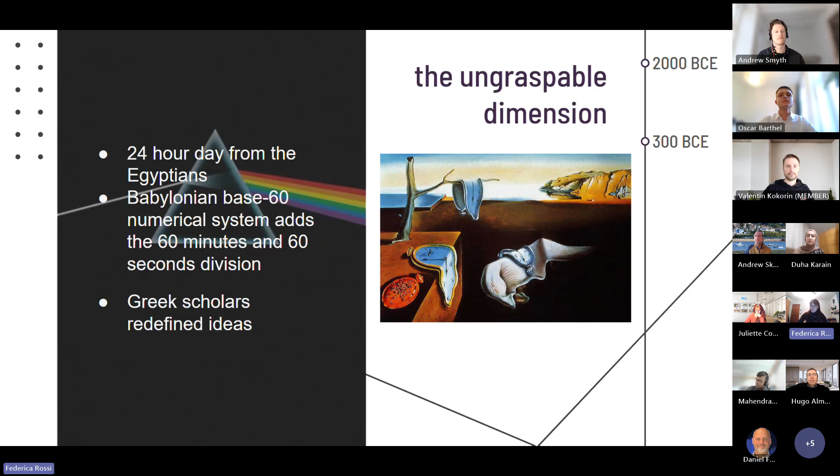But how can we measure time actually? We see days going by looking at the sun. We can feel the seasons changing and repeating, and this repetition gives us the concept of years. But when we come to smaller periods of time, we do have some kind of limitations. That's why we need to rely on something that feels time better than we do. This something is oscillating processes.

In fact, one of the first mechanisms used for time telling was the oscillation of a mass. This type of mechanism arose probably in monasteries, with the purpose of tolling bells and calling monks to attend prayers. As I said, it used the oscillation of a mass, and it was composed of a foliot, which is this horizontal bar. The foliot is moved by a gear train.

We have the escape wheel, which gives an impulse to the foliot. It oscillates, and coming back, it disengages from this escapement wheel. The relation between the escapement wheel and the foliot permits to stop and move a train of gears, which will move the displayed hands. The power source is a mainspring, which is coiled inside a barrel and works as a power source.

The oldest still working example of this type of mechanism is the Salisbury Cathedral clock, and as I said, it's still working. This type of mechanism has obviously many limitations. In fact, the foliot mechanism is a non-resonant mechanism, and it lacks a natural restoring force. It can be tuned thanks to the movement of the masses, but it still has a deviation between 30 to 60 minutes a day with respect to the theoretical time.

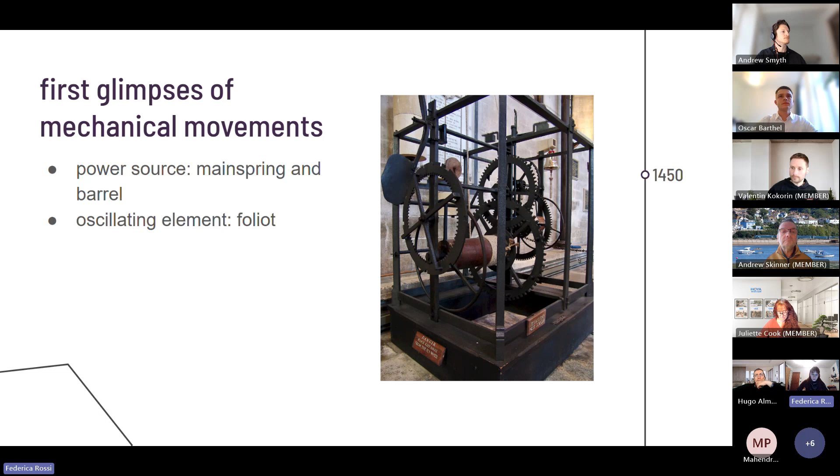Around the 17th century, a new type of oscillation was considered for time-telling purposes, and this oscillation is the pendulum oscillation, which was first noted by Galileo Galilei. Later on, a Dutch astronomer invented and designed the first pendulum clock, and we achieved better accuracy and reliability than the previous mass mechanism.

This type of mechanism is reliable for small arcs, and it has some kind of limitation, mainly due to the changing of temperature and humidity, but also the deformation of the material. In fact, the period of this oscillator only depends on the length of the pendulum, which actually changes over time. As time went by, we have improvement of the mass oscillating mechanism with the adding of many other components.

This type of mechanism was greatly improved over the years, and we achieved a state of the art around the 18th century. This mechanism, which you can see in the slide, is still used in the mechanical movement of our wristwatches. How does it work?

We still have the mainspring, which ensures the power source. The foliot was substituted by an oscillating mass and a hairspring, and we still have the escapement wheel, but it is in interaction with the pallet fork. Furthermore, we have the introduction of jewels, which, due to their hardness and surface finish, were perfect as bearings in pivoting positions. How does this work?

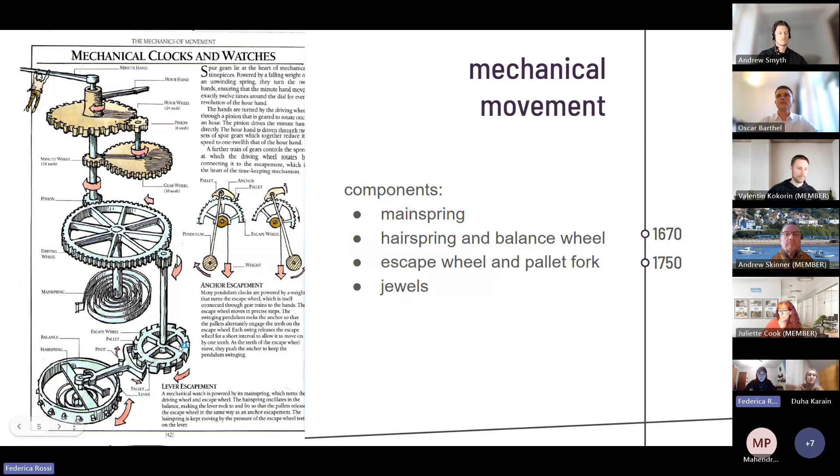This rotation will generate a new impulse, which will be transferred to the pallet fork, which will disengage, and this disengagement permits the motion of one step of the whole train of gears. In fact, the entirety of this mechanism only moves when the lever escapement is free.

Here you can see an animation of the mechanism and how the escapement wheel, pallet fork, balance wheel, and hairspring actually interact. These mechanisms obviously have some limitations, mainly due to the interaction of each element with one another. It's due to friction, and also due to technological limitations in manufacturing.

For ages, it was not possible to highly improve the precision, and this limitation was only overcome with the invention, or the discovery, of a new type of oscillation. This new type of oscillation is a piezoelectric oscillation.

The piezoelectric mechanism, which was used in the quartz watch mechanism, was first introduced in the 1920s, but only in the 1960s did we have mass production of a quartz wristwatch, which was the Astron from Seiko.

This inaugurated the quartz crisis, since before we had a more traditional idea, a concept of watchmaking, mainly in the Swiss sector. Later on, we had this Japanese wave of electronic timepieces that were more accurate and at a fraction of the cost of mechanical ones.

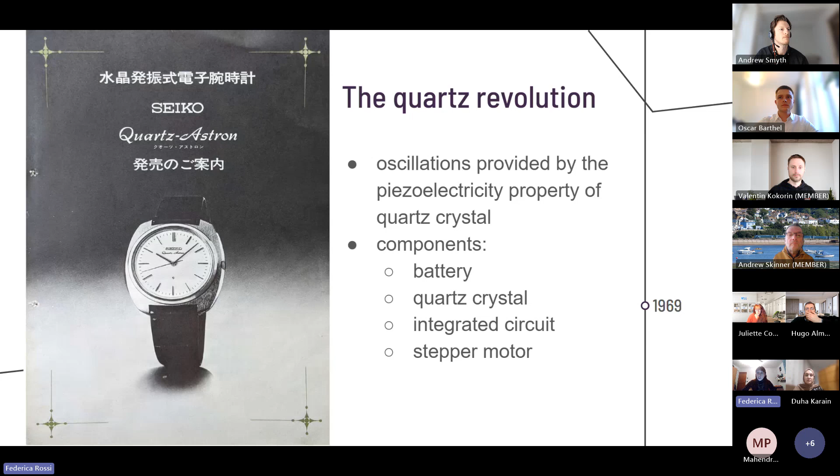A quartz mechanism is composed of a battery, a quartz crystal, an integrated circuit, and a stepper motor. The quartz crystal is shaped as a tuning fork, and it is grown synthetically in order to obtain a natural frequency of 2^15 Hz.

At the beginning of the life of this mechanism, the battery drives the integrated circuit. The integrated circuit applies a voltage difference to the crystal. When the voltage difference goes back to zero, due to the piezoelectric property, the quartz will deform to return to its original shape, and this deformation will generate a voltage difference. This voltage difference is an alternating voltage at the characteristic frequency of the quartz, which is, as we said, 2^15 Hz.

The integrated circuit amplifies and feeds back this voltage to the quartz. This way we have a self-sustaining vibration, and this vibration is used to obtain the concept of the hertz. In fact, this frequency is extremely high, but inside the circuit we have a component which is a frequency divider, which divides the voltage frequency by 2^15. This way we achieve the knowledge of 1 Hz, which is 1 second.

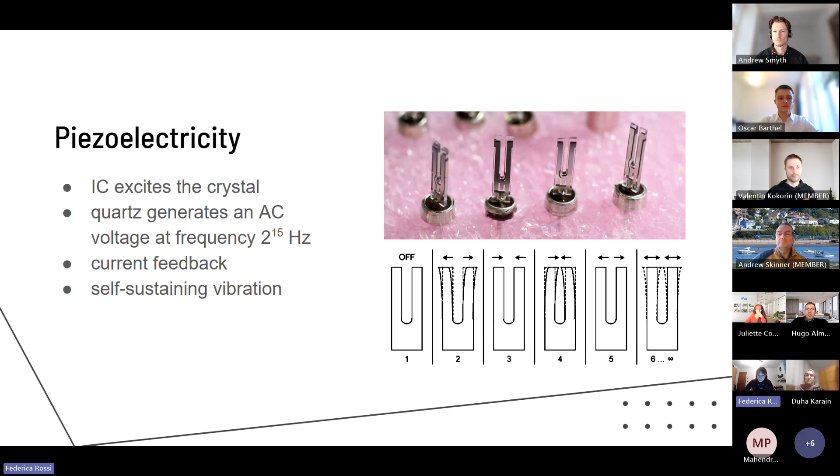Once the 1 Hz frequency is known, the integrated circuit generates a signal which is suitable for driving a rotor. This rotor is a Lavet-type stepper motor, and basically it is composed of a stator, a single coil, and a rotor, which is a permanent magnet rotor.

How does it work? Basically, the integrated circuit sends a current in the shape of a pulse. When the coil has the current, a magnetic field is generated, and the rotor will align accordingly. When the current comes back to zero, the rotor will align with the nearest equilibrium point. This nearest equilibrium point is not the previous one, but is slightly above it.

And this way, the rotor will always achieve the nearest equilibrium only by moving in a clockwise direction. This rotation is exploited for the motion of the displayed hands through a gear train. So we achieve the 1 Hz frequency.

This frequency is used to generate the signal controlling the Lavet-type motor, and this motor is the one which controls the time displaying. The impact of this invention is evident when comparing the complexity of the mechanisms. Both have a characteristic frequency: one given completely by a mechanical oscillation, the other is also an oscillation, but the 1 Hz is obtained precisely through the integrated circuit.

The colored elements are the bearings. Here you can see a sheet of the tolerances needed to have a precise wristwatch, and as you can see, we are in the order of the micrometer. The micrometer precision was achieved in CNC only in the 50s and 70s. This translates into complexity, but also complexity in manufacturing, which means major costs.

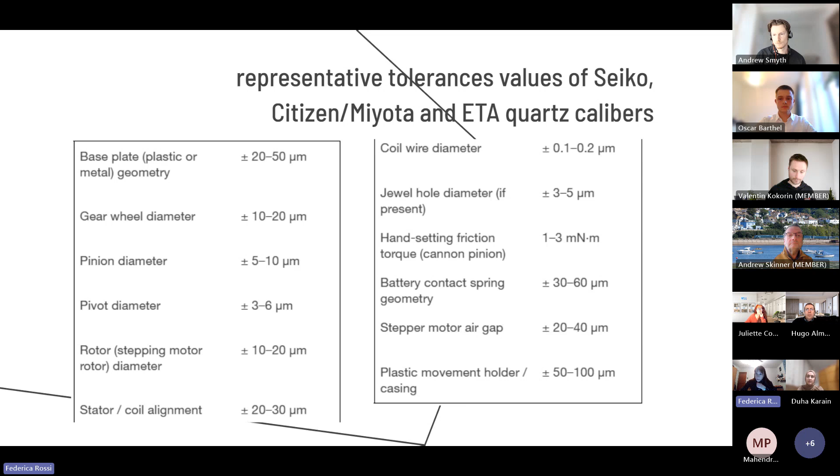In conclusion, quartz mechanisms allow us to achieve great accuracy at affordable prices, but probably mechanical mechanisms will always be an inspiring example of engineering artistry and the seek of perfection that humankind keeps striving for. I hope I was clear, and I thank you for your time.

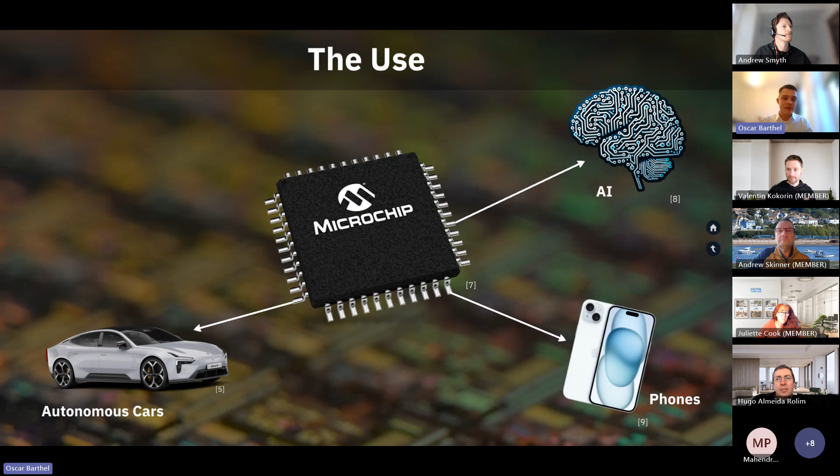So you can see there is really no getting away from microchips these days. This is why I think everyone should have at least heard about the way they are structured, how billions of nanoscopic wire connections and transistors allow our modern technology. And once you've heard about that, I can guarantee you'll want to know how we are even able to produce these intricate and complex pieces of technology.

After that, we'll take a quick dive into the machine at the heart of this whole production process, the EUV lithography tool. And this is also where I'll be able to share a bit of the hands-on experience I could gain while working at a company called Trumpf. Maybe some of you have heard of them, that produce the lasers powering this machine.

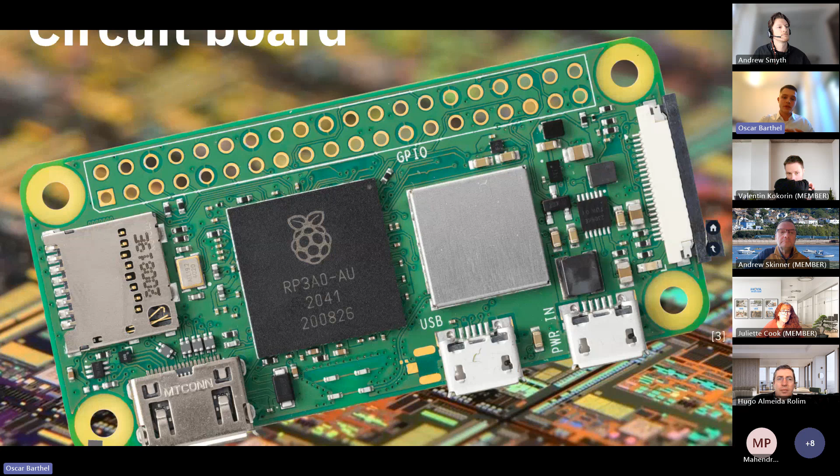Now, zooming into the structure section right here, we can find a standard circuit board. As you know, these circuit boards are literally built in everywhere nowadays. Looking at the processing unit right here, we can already see a scheme of one of these microchips. And as you see, it's just a complex maze of little wire connections.

Taking a look from the side view, we can see in gray and golden the horizontal connections in X and Y direction, and also vertical pillars called vias that form the electrical connections between our different layers. And as you see, these layers get smaller from top to bottom.

Now looking at the foundation layers down there, we can see a third material that's beige colored right there, and this is silicon dioxide. This is just an isolating material that prevents all of our metal connections from touching. And now if we zoom all the way in there down to the bottommost layer, we can find another type of layer, the transistor layer.

And transistors, they are basically just switches. You apply a voltage, they switch on or off, allowing us to form a logical 0 and 1. And with that, we are able to perform simple binary calculations, like binary 1 plus 1 equals 1, 0. Now, connecting some of these transistors together allows us to do more complex calculations. And by connecting billions of these transistors together and making billions of calculations every second, a microchip or computer really comes to life.

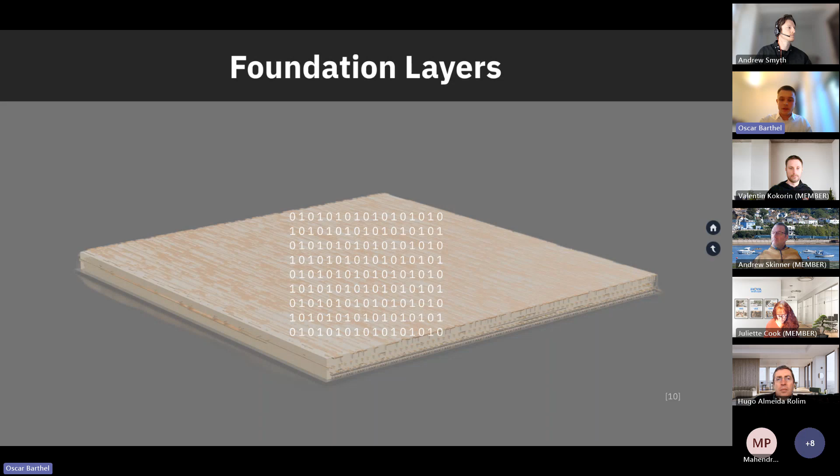Now, for our modern technology, for autonomous cars or AI, we need to do more and faster calculations. And one of the obvious solutions is to simply shrink down the transistor size so that we can fit more of these transistors on the same chip. This has gone so far that in the newest generations of microchips, the smallest feature size goes down to just 10 nanometers.

Now, to give you a little size comparison of the dimensions we're talking about here, just imagine you're taking this microchip and scale it up to have the size of the whole city area of Berlin. Then one of the transistors on this microchip would only be as big as a McDonald's cheeseburger. Now, this means two things. First of all, we could fit 14 billion cheeseburgers into Berlin. And second of all, and a bit more important, unfortunately, we're able to fit more than 14 billion transistors on one of the newest microchips.

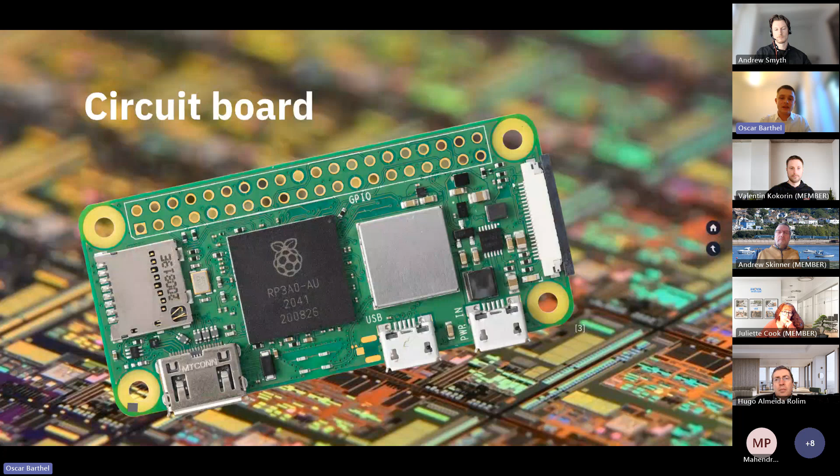But how are we even able to produce these complex, tiny, teeny, tiny transistors? And the answer is light, but not just some light.

Imagine you want to paint a picture. For some part of the picture, you can use a thick marker. For other, more intricate parts of the picture, you will have to use a fine liner. Just in our case, we're not painting a picture using pencils. We are painting the pattern of our wire connections onto our microchip using light. And the thickness of the lines we can paint is not determined by the tip of our pencil, but by the wavelength of the light that we use. The shorter the wavelength, the finer the structures we can paint.

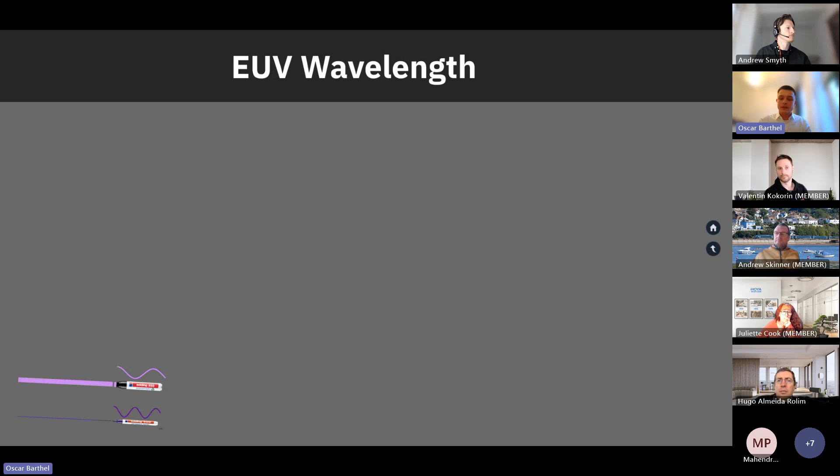Here you can see the light spectrum. Before, in the older generations of microchips, it was enough to use DUV, deep ultraviolet light. But for our new generations of chips, we have to use extreme ultraviolet light, short EUV, with a wavelength of only 13.5 nanometers.

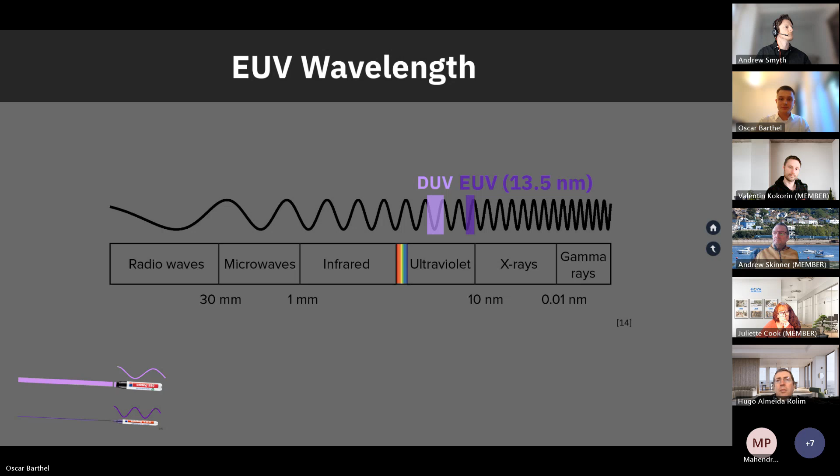Now that you have a rough understanding of the structure of these microchips and of the EUV light we use to produce them, we will take a look at how one of these connecting layers is being produced. It all starts with what's called a wafer, which is just a thin plate of pure silicon.

Jumping right into the production of one of these connecting layers on top of a few already existing connection layers, we can see the silicon dioxide, this isolating material again. Our plan now is to dig trenches into the silicon dioxide to reach the underlying metal connections, the pillars, and then fill these trenches back up with copper to create the metal connections.

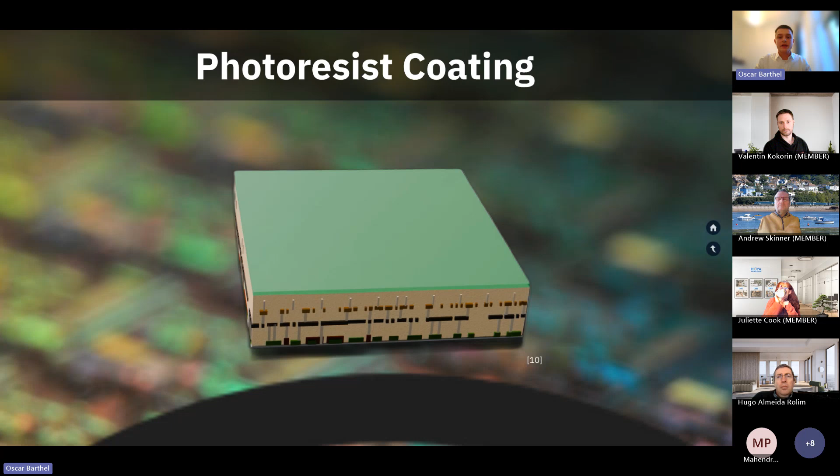In order to do that, first we have to apply a layer of photoresist coating. Next up, we can already use the EUV light I introduced before. This EUV light is sent through a stencil that has the pattern of the wire connections we want on our microchip, onto this photoresist coating. With that, we're able to print the fine structures of these wires onto our microchip.

This EUV light is so powerful that it breaks up the atomic structure of this photoresist coating, and we can simply apply a solvent solution to wash the broken down structures away, revealing the silicon dioxide. All that is left to do is apply a special etching process to etch the silicon dioxide away, and as you can see, we already reached these metal connections down there.

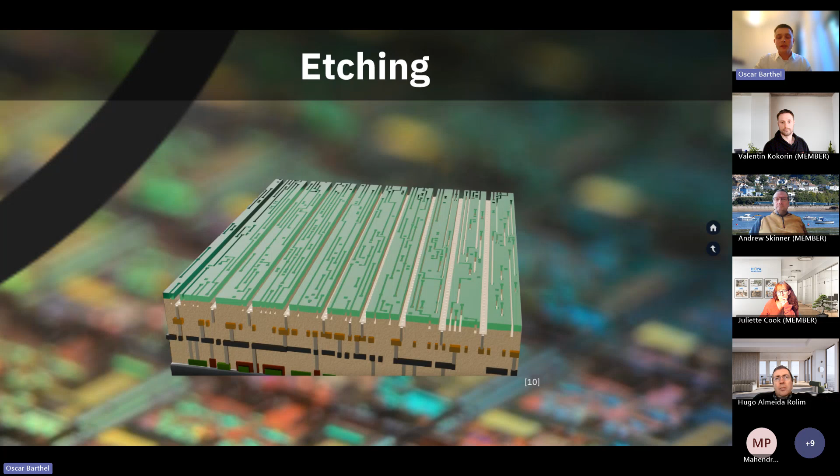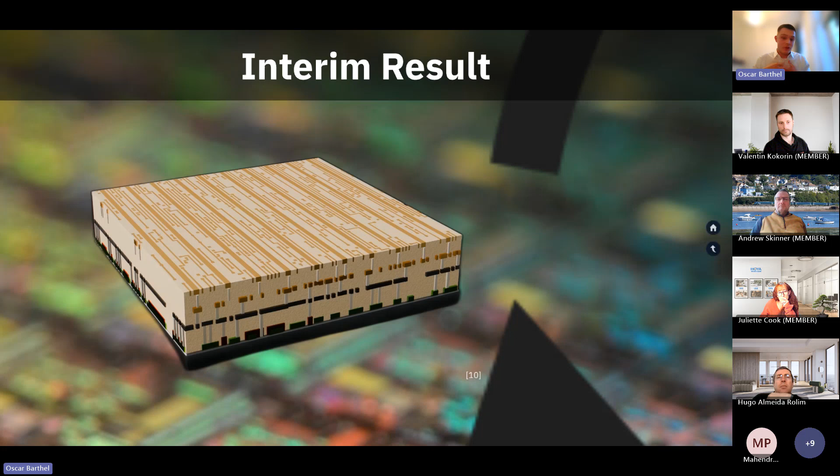Now we simply have to remove the rest of the photoresist coating, fill the trenches up with copper, and after we have ground everything down nicely, we are left with our interim result, which I personally think looks quite beautiful. This process is repeated 40 to 100 iterations, depending on what special kind of microchip you want to produce. After all of these iterations, we are left with a wafer filled with identical microchips. If we zoom all the way in, we can find the microchip we have just created.

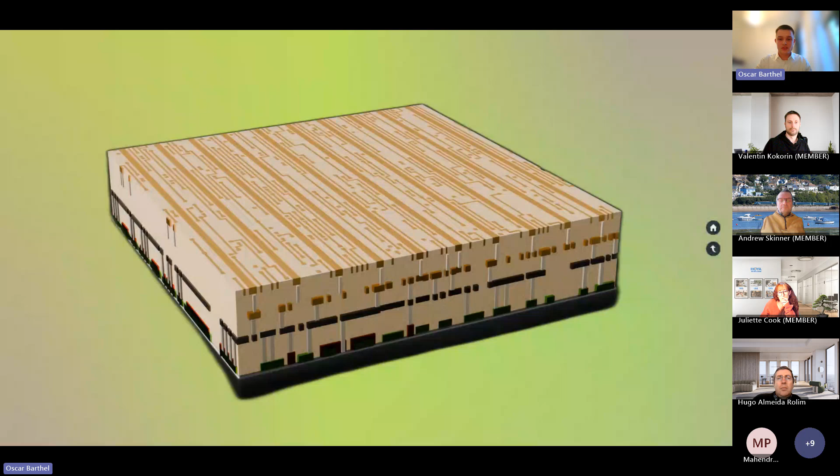Now, let's take a step back from this production process and take a look at the machine at the heart of it, the EUV lithography tool. This machine powers everything in this production process, and it produces the fine EUV light we need for it.

While I was working at the company that produces the lasers for this machine, I learned something new about the incredibly complex interdependencies of all the parameters and parts in these lasers. What's stunning to me personally is that this complexity can't even be found in this big machine, this big corpus that's always depicted as the EUV lithography tool, but these crazy complex lasers are actually located in a separate room below this machine. So when the real complexity starts, the laser beam has long been produced.

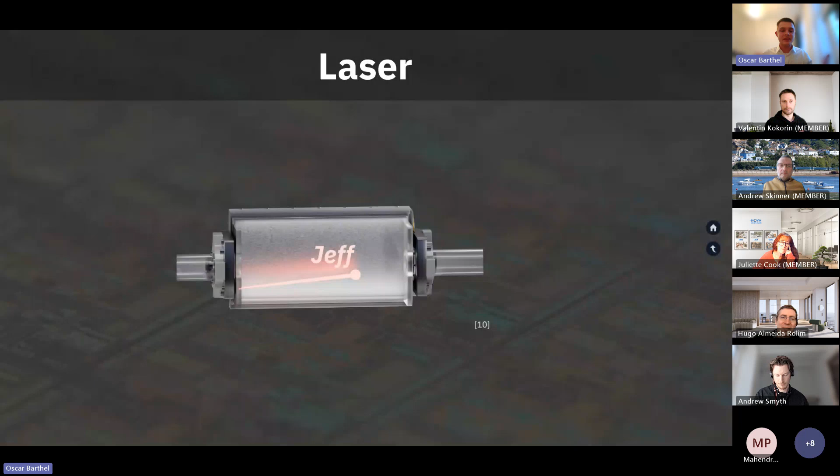But to break all of this complexity down a bit, we will take a look at the workings of the laser and this machine through the eyes of a little photon called Jeff. And this is Jeff right there. Now, Jeff is bouncing around in this laser chamber, this laser cavity, and he's constantly fed with energy in the form of other photons, his brothers and sisters. They are all trimmed and steered in the right direction to form a synchronized laser pulse.

This pulse is called the pre-pulse. It has a power of 5 kilowatts. After Jeff and his brothers and sisters are released in the form of this pre-pulse, another pulse is formed called the main pulse. These two pulses are guided through a set of mirrors from the room with the lasers down there up into the source chamber of our EUV lithography tool.

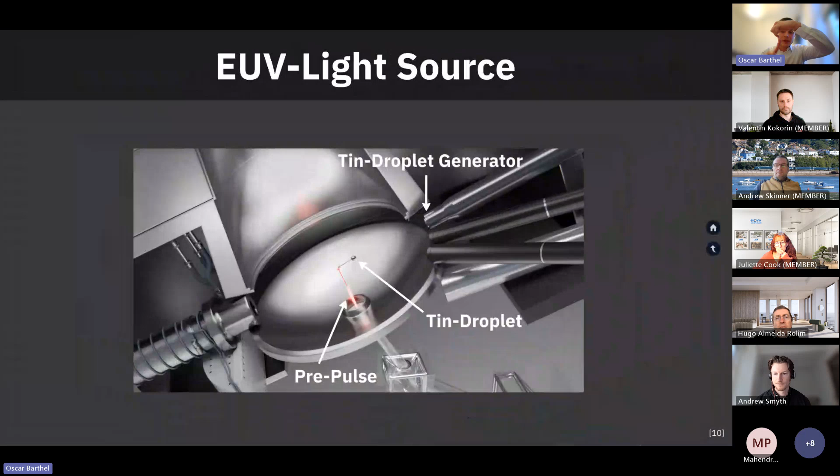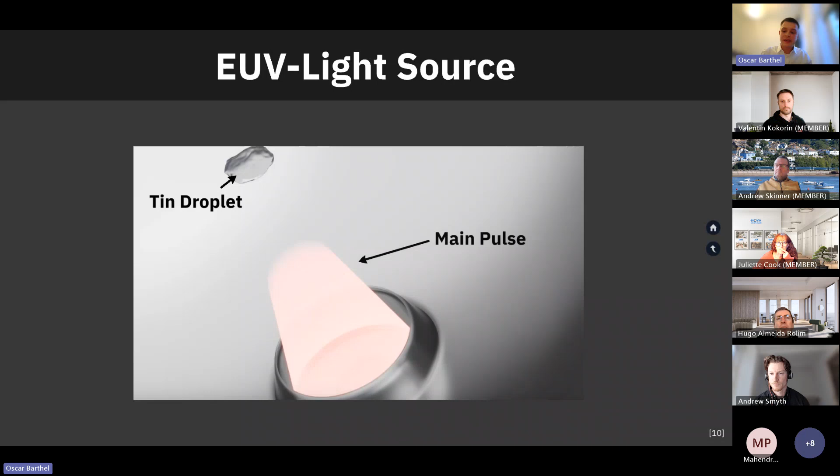Now, zooming into the source chamber, we can already find Jeff forming the pre-pulse being aimed directly at a tin droplet that was ejected from a tin droplet generator. Just in the middle of this source chamber, the pre-pulse hits this tin droplet, causing it to expand into a plate-like form. Just when this plate reaches its peak size, the main laser pulse comes shooting into the source chamber as well, hitting the tin droplet and instantly causing it to transform into its plasma state. During this transformation of tin to its plasma state, our precious EUV light is being emitted.

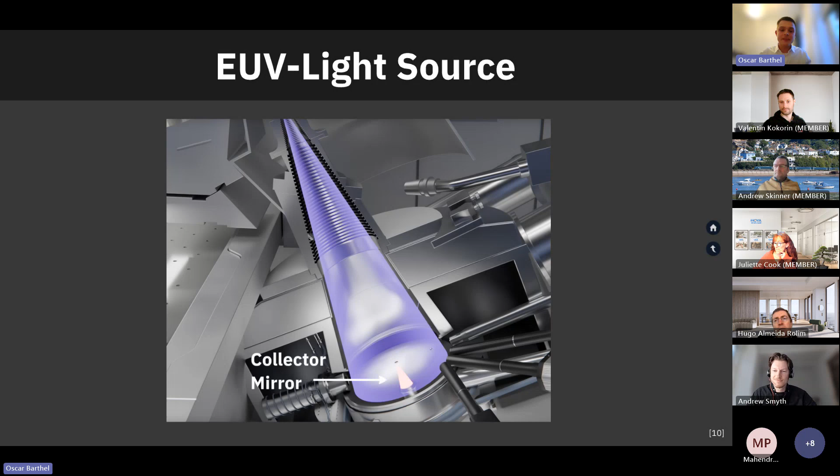This EUV light is being collected by a massive collector mirror. This mirror is so even that if you scaled it up to the size of the whole country of Germany, it would only have a thickness deviation of less than 1 millimeter, or 1% of a cheeseburger's thickness. Now this light is being focused into an intermediate focus, and with that we reach the third part of our illumination process called the projection optics.

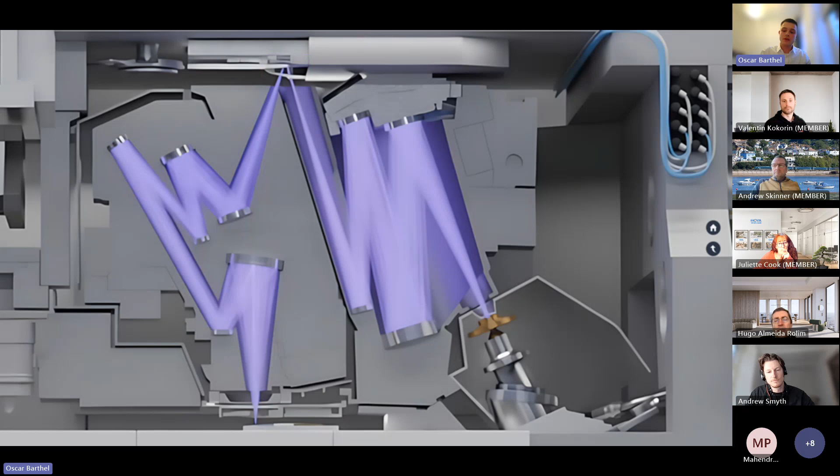First, the EUV light is guided and shaped by a set of mirrors onto what's called the mask. This mask is basically just a mirror with a layer of absorbent coating that has the pattern of the wire connections we later want to print on our microchip. When the EUV light hits this photomask, it is only reflected in the areas we want to illuminate on the microchip. This EUV light, imprinted with the layout information of our wire connections, is sent through another set of mirrors, scaling it down and guiding it to the bottom of the machine onto the wafer. And with that, we are already back in our production process.

As you may remember, the only steps left are to wash away the broken down photoresist, dig our trenches using an etching process, and then fill these trenches back up with copper.

Now, since progress must continue and humans are never satisfied with the status quo, engineers have been working for decades on improving this technique even further. If we look into the future of EUV, we find that improving this technique will mainly be possible by tweaking two important factors.

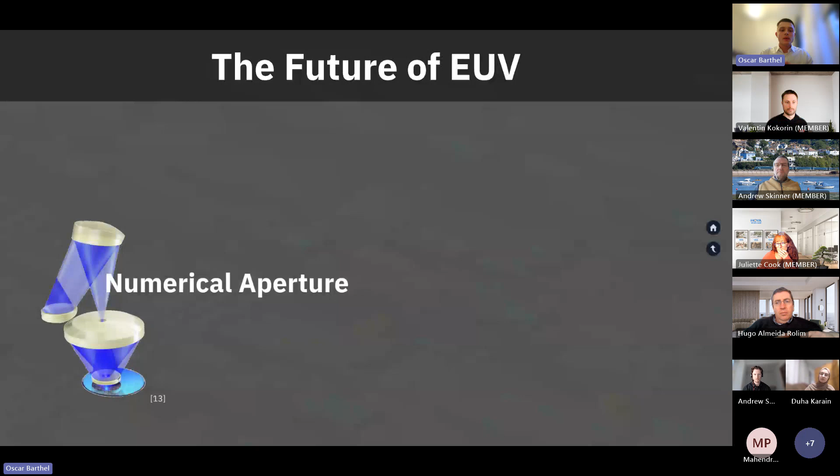Yeah, perfect, thank you. Now we're in the future of EUV, and as I told you, one of the mechanisms to improve this EUV technique even further, to enable us to print tinier features, is tweaking the numerical aperture of our optics system. When we tweak and improve this numerical aperture, we're able to form a tighter focus spot that allows us to create sharper edges and tinier features on our microchip.

The second research field is the process factor. This process factor incorporates all of the things in the EUV process that influence the quality of our EUV beam. It can be tweaked or optimized by, for example, simulating the illumination process or optimizing our mask layout.

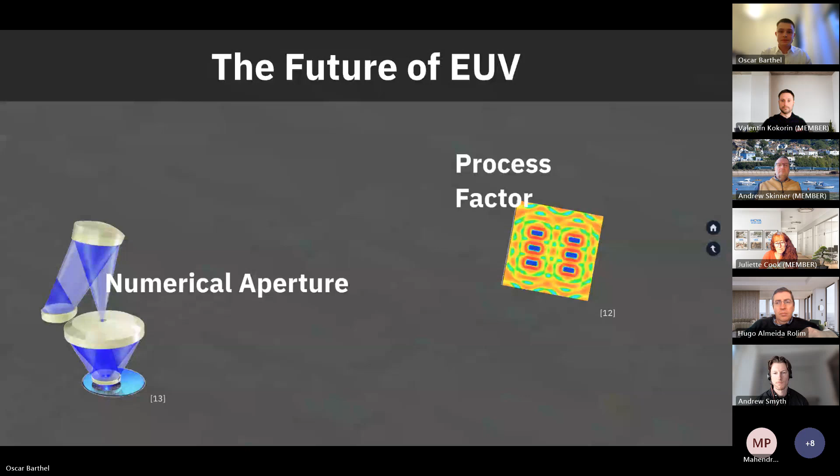And with that, we have already reached the end of our journey through the world of microchips and EUV lithography. I hope you learned something new and interesting about the structure, how these intricate wire connections work together to enable faster and more calculations for our modern technology. I hope you learned something interesting about the production process, how all of these steps work together to allow these teeny tiny transistors, and of course I hope you learned something about the crazy EUV lithography machine and its beautiful little life. So have fun using all of your microchip-powered devices for the rest of the day, and be aware of possible malfunctions when you see an autonomous car driving by.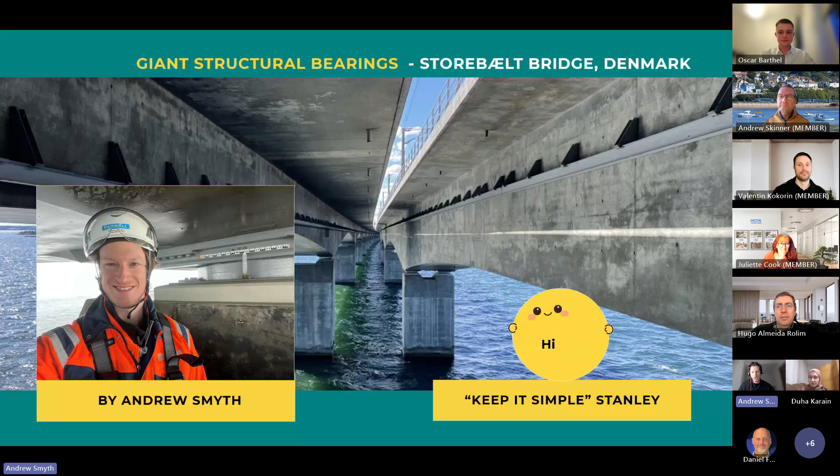Okay, Andrew. So hello everyone, my name's Andrew Smyth. I'm going to talk to you about giant structural bearings on Storebælt Bridge in Denmark. My co-presenter is Keep It Simple Stanley, who needs to rein me in as an engineer — I tend to overcomplicate everything, so he's hopefully there to tell me to keep it simple.

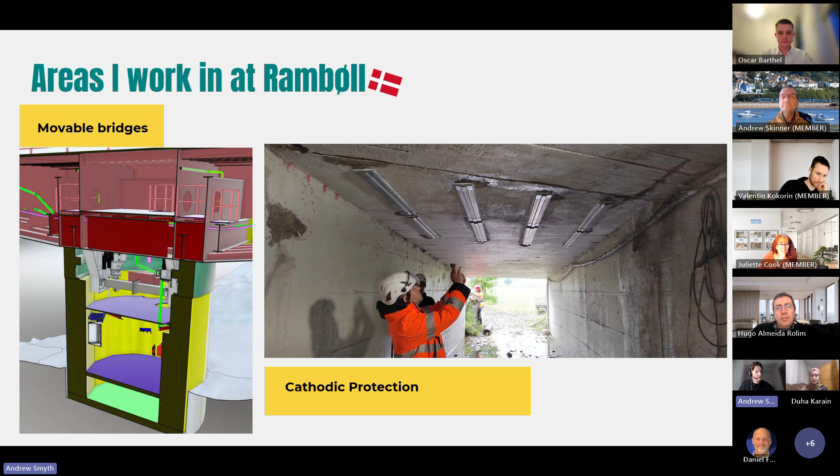I work for a company called Rambøll in Copenhagen. I'm a mechanical engineer in a kind of civil engineer's world, really, so I deal with a lot of structural mechanical devices on bridges and big civil structures. I'll be talking about bridge bearings today, but these are some of the other aspects I deal with — other fun stuff like movable bridges, actuators and hydraulics, and a little bit of cathodic protection, if you remember that from chemistry, stopping things rusting. It's interesting, I find, but not quite as exciting to watch.

So the bridge I'm going to be talking about is Storebælt West Bridge in Denmark. Denmark is a lot of islands strung together by big bridges. Storebælt Bridge is the biggest one in Denmark. It's got 14 million vehicles crossing it every year, about 43,000 trains every year, so it's a really vital link to the rest of Scandinavia from Germany. Here's a picture of it.

It's actually two bridges, really. You've got the East Bridge in the far distance — that's the pretty one, it's a suspension bridge. Then there's a little island, and then we have the West Bridge, which is two bridges, really: a road bridge and a rail bridge. Let's put a laser point on it. So we're going to zoom down and have a look at that.

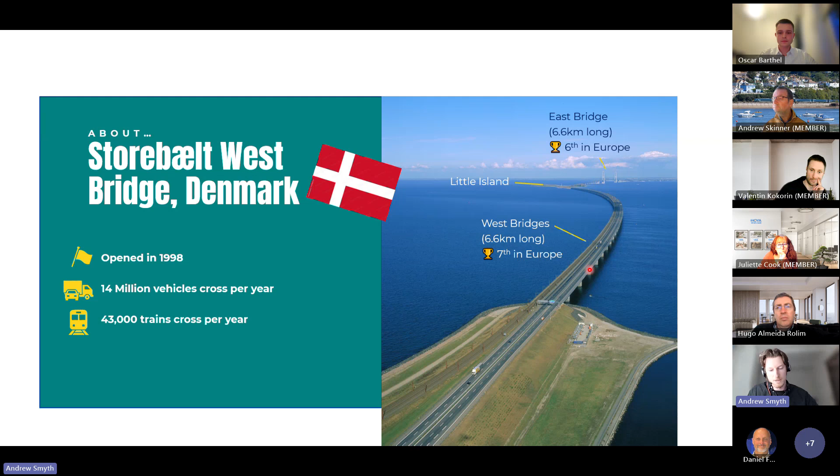So why do you need bridge bearings? Well, consider that the bridge is actually quite dynamically loaded — it's a 6.6 kilometer bridge, and over the course of a year between the hot and cold periods, it expands and contracts by about 6 meters difference. Plus, there are lots of really strong, heavy winds bashing the bridge deck, heavy trucks going over, trains zooming by, and — we hope not, but it has happened — there can be a ship impact as well. So the piers under here are very slim and slender, and we need bearings there to make sure the stresses don't go into the piers. The pot bearings are basically there to manage the loads and allow the bridge deck to move freely without stressing the piers below.

So I'll try and do a quick thing about the bearing layout on a bridge.

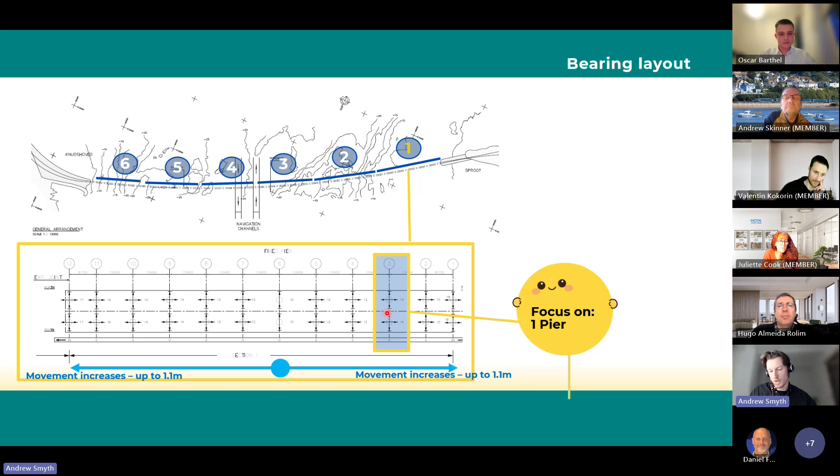So this bridge is divided into 6 sections. If you focus on one section, we have an actual fixed point in the middle of the bridge, and all the expansion and contraction moves away from that fixed point. So the bearings furthest away see the most movement. We're just going to talk about one pier out of 64 in total. So that's what it looks like.

But we can use SolidWorks to cut through and have a look. The reason it's called a pot bearing is this is a pot, and there's a rubber pad that sits inside. These things take loads of vertical load - they can handle 48 meganewtons.

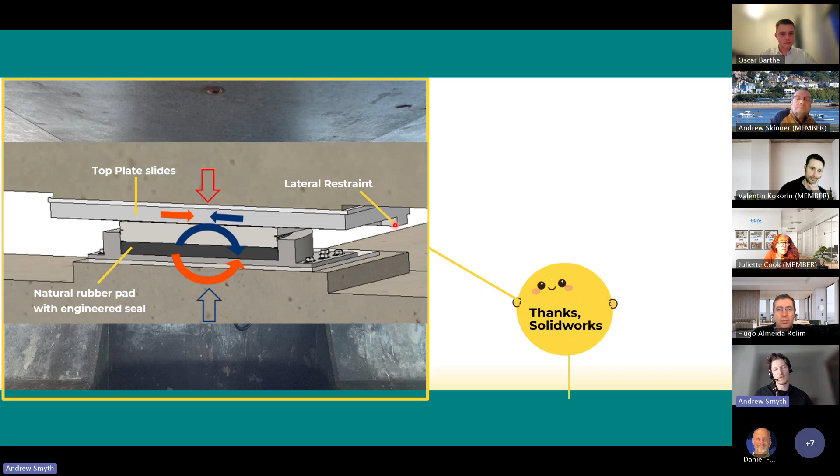This rubber pad acts like a liquid, designed to allow rotations. You have lots of seals going around the pad, engineered to make sure the pad doesn't escape. Then we have a top plate on top that slides back and forth to allow movement. We also have a restraint on the side that takes up some of the impact, including from ships.

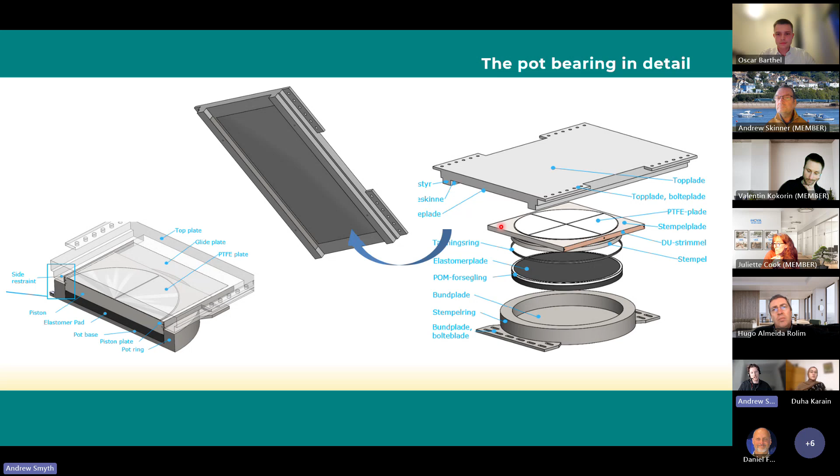You can tell a bit more when you rip the thing apart - that sliding motion with the top plate is actually from a polished stainless steel surface underneath. Then there's a PTFE plate with little dimples in it and bearing grease. It's really well engineered, and you get something like 2% friction coefficient between these two surfaces. That's one of the most important parts of this bearing design.

I'll do an intermission to say there's actually loads of bearing designs. That's why I love working in this field, especially with bridges from the 60s and 70s - the designers would just come up with any old design, and you'd have to work out what it's doing. So part of the investigation process when trying to work out how long a bridge has got to live is to work out what is actually there.

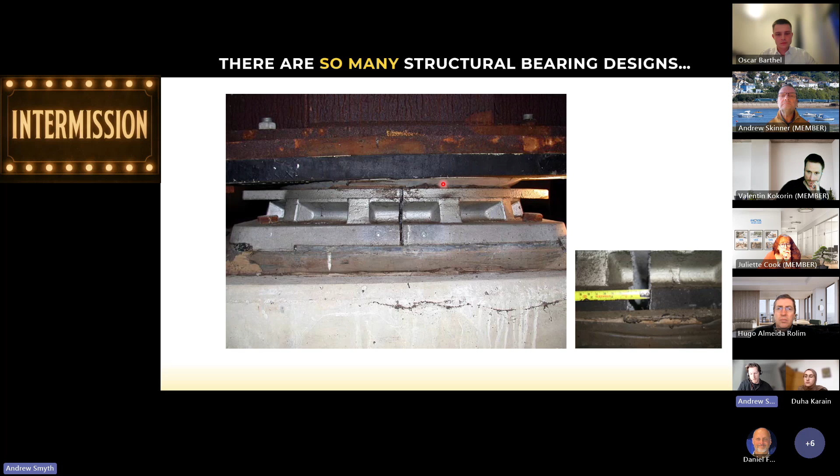It's endless fun. So the project purpose for this one is threefold. We want to know, first of all, how long are the bearings going to last? How can we replace them, or can we replace them? And also, what is the replacement strategy? That's what we did for the client, which is the bridge owner.

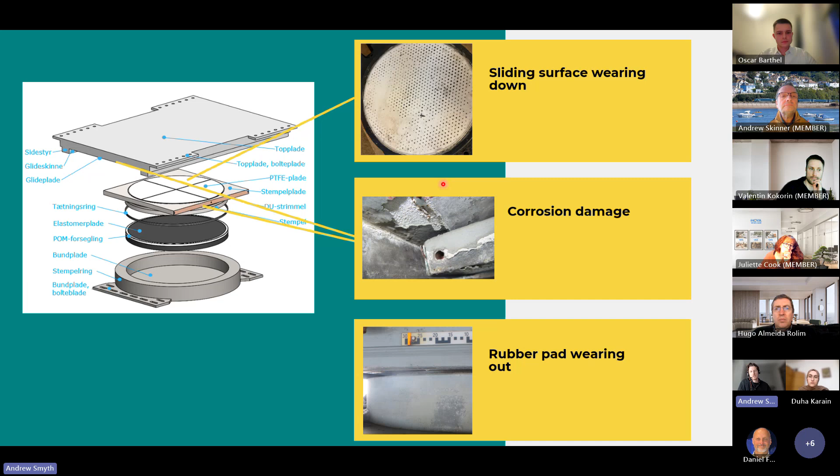So firstly, how long will these bearings last? The three main things we're looking at are the sliding surface, the corrosion damage that can occur, and also the rubber pad wearing out. Those are the three main wear factors.

How do we do it? Mostly through physical inspection. We've got inspection data going back to when the bridge opened in 1998. So this is me having a go, and it's a nice sunny day there, but that's not often the case. It only takes a bit of wind, and you can really feel like you've been slapped in the face when you're out to sea like that all day.

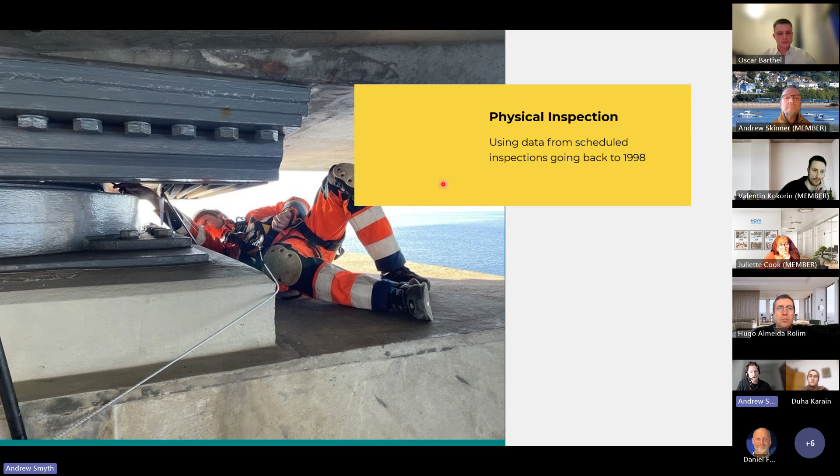It's tireless work. I'm trying to measure the PTFE thickness, using feeler blades to about a 0.1 millimetre measurement to try and measure some rates of change. Now, it's not the most accurate, but we've got a lot of data every 3 or 4 years going back right to the start of when the bearings went into service. So we can use all of that data to build up a pattern of how these things are wearing out.

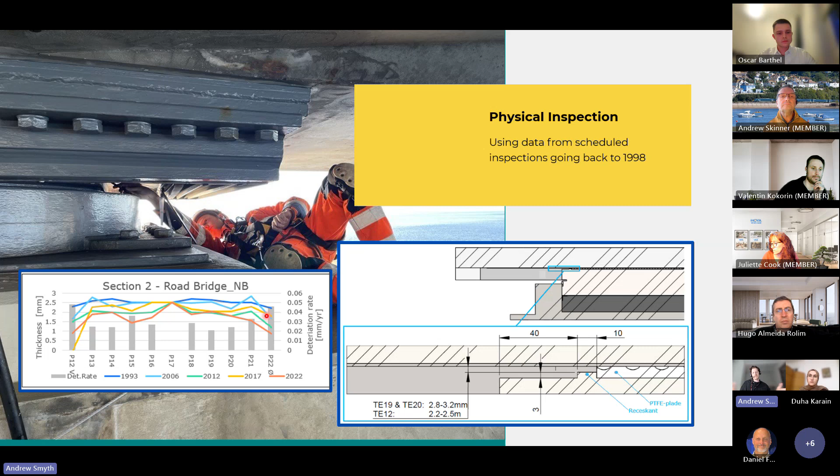What we can actually see is the fixed bearing that doesn't move much, hasn't worn down much over time, but the ones closest to the ends of the sections where they were moving more have worn down, which is, I guess, a bit obvious.

We also do a lot of visual inspections, looking at corrosion and damage to the most important parts, like the sliding parts. As much as possible we record it numerically so we have data to draw on to look at how the damage has changed over time, and then work out the rate of change.

Physical inspections are irreplaceable, but we can't tell everything from them. The rubber pad I mentioned is in there and we can't see it, so one way we can record what it's doing is remote monitoring.

We measure to a 10 Hertz frequency over time. How is this bridge moving? How is the bearing moving? Then we can look at past data to work out how much the bearing has rotated and what distance the rotation travel has been, and then we can see, okay, the pad is probably at the end of its life.

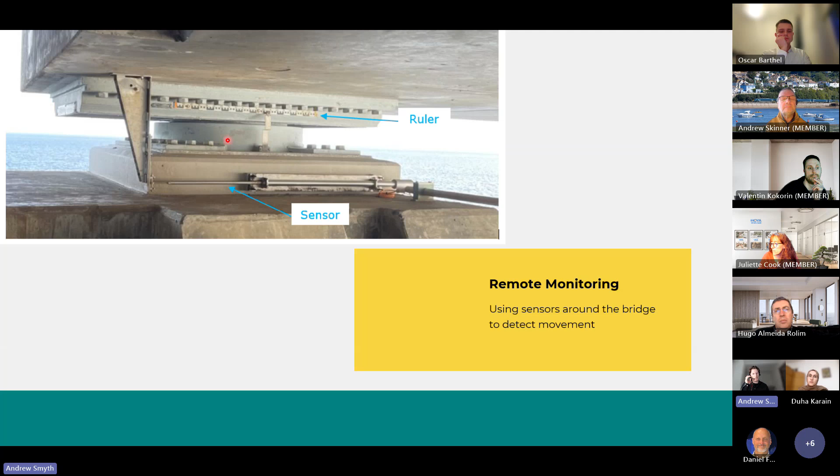That's the main ways we build up a picture of how long these bearings have lasted, so we then do a bit of an assessment. We take into account all the key wear factors I've mentioned and try to build up a formula, which was a really hard thing to do.

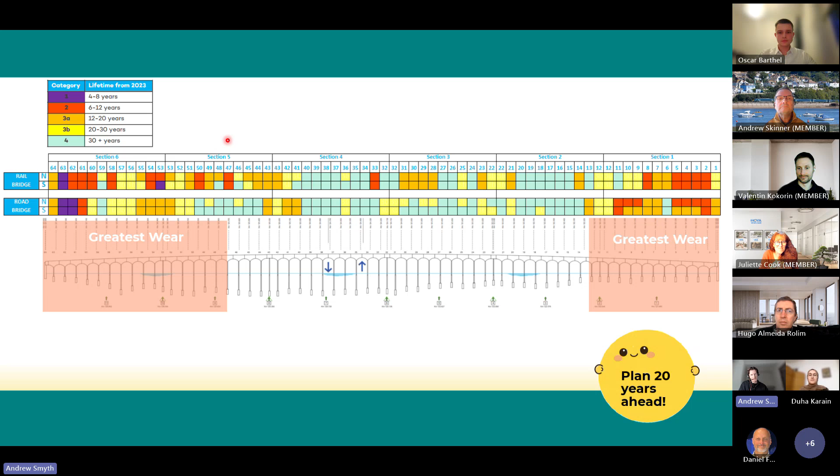This is what I think I looked like back in the summer of 2023, trying to work it all out. I won't bore you with the formula, but essentially what we ended up working out was a lifespan for each one of the bearings.

We could see that within the next 20 years, around 180 of 290 bearings needed to be replaced. We're looking 20 years in the future because we know this work to replace them is going to be costly and take a lot of time, so that's the mark we're working to. Everything within 20 years we need to start to replace within this next project.

Incidentally, the greatest wear was found at the ends of the bridges where the piers are a bit shorter and stiffer, so the bearings do a bit more work, whereas in the middle the piers are a bit longer and flex more. We also found the rail bridge moved more dynamically and wore down more quickly.

So then we moved on to, well, can we replace these? Let's see if we can lift the bridge. To get the bearings out, we have to lift the bridge, and with 48 meganewtons involved we can't just pull these bearings out, so we use hydraulic jacks to lift them up.

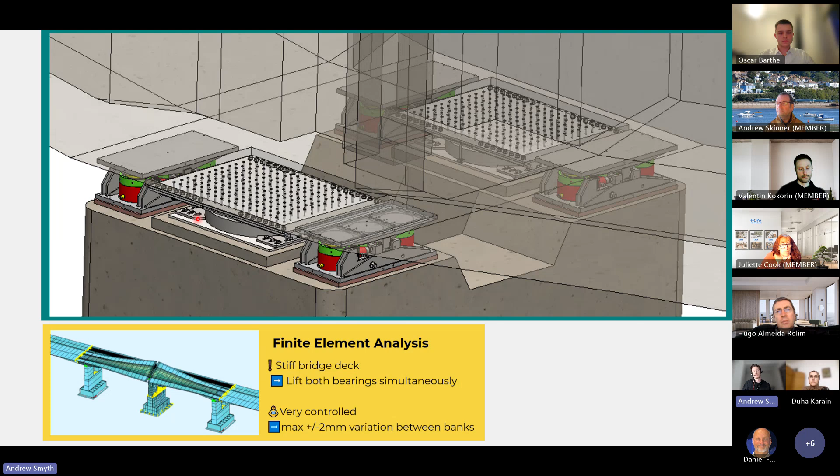We did a finite element analysis of the structure locally to work out that the bridge is really stiff, so we need to lift at the bearings with about ±2 millimeter accuracy. We can't just lift one side and leave the other down, as it would damage the bridge, so we've got to do it really controlled and really accurately.

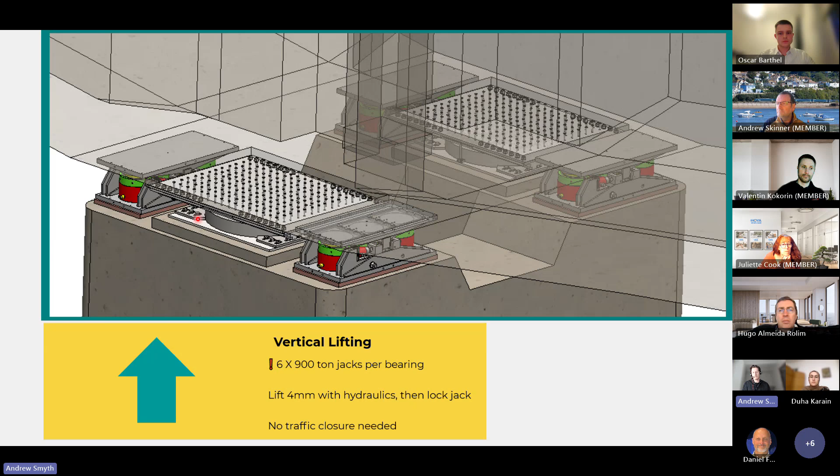What we're doing is using 6 900-ton jacks per bearing to lift up, only about 4 millimeters just to take the compression out of the rubber pad, and we don't need any traffic closure for this. We do know the bridge is likely to move a little over time on the jacks, so we'll have to realign it using some lateral jacks that push the bridge horizontally.

Now I'll zoom into these hydraulic jack assemblies, because this is kind of fun mechanical stuff, we like to look at this. These jacks act like a temporary bearing, because when we do this work, we're going to be sitting on these jacks for about 2 weeks. The bridge is going to be on jacks for about 2 weeks, so we need a kind of bearing system, and so we've made one.

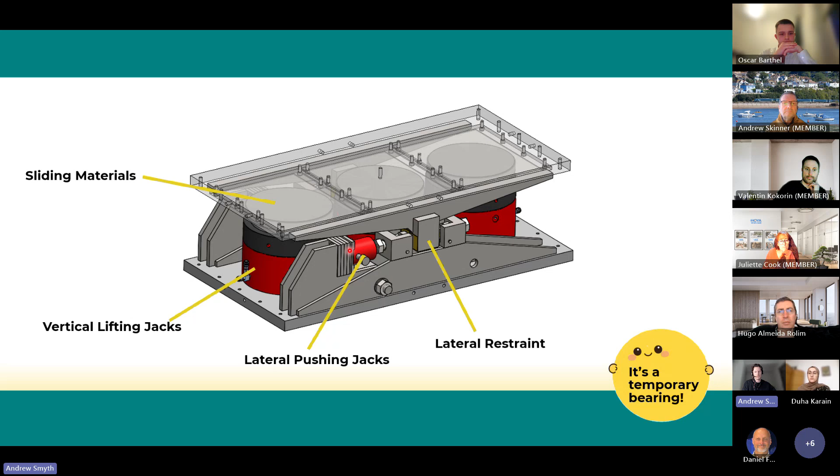So we have the same kind of sliding materials that you'd have in a bearing, the same kind of lateral restraint as well, and then we've got our jacks that are going to lift it up and push it along. I'll show you a fun detail of the lateral restraint: when we want to lift the bridge, we first restrain it using this little bolt to turn and clamp it, with a retaining screw to stop the bolt moving. Then when we want to push the bridge, we take that screw away and use the jacks to push the bridge sideways.

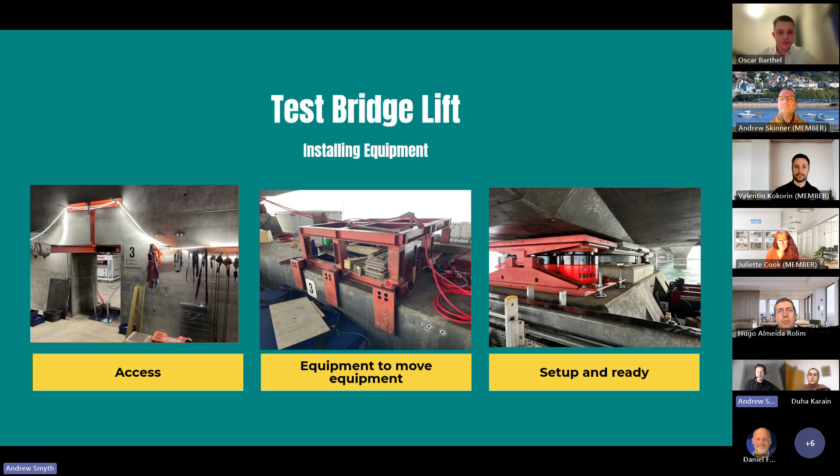So that's it all set up, and it needed quite a lot of big equipment even just to slide everything back and forth. Actually, doing this lift is kind of not even that exciting. There were TV cameras for the first of the three lifts we did, and I guess they didn't come back because when you're actually doing the work, it's not very dramatic. You end up staring at a laptop screen most of the time, making sure you're within the limits and margins. But it was really nice to test the system, and we were really pleased we were able to lift the bridge and push it, and that all the systems worked.

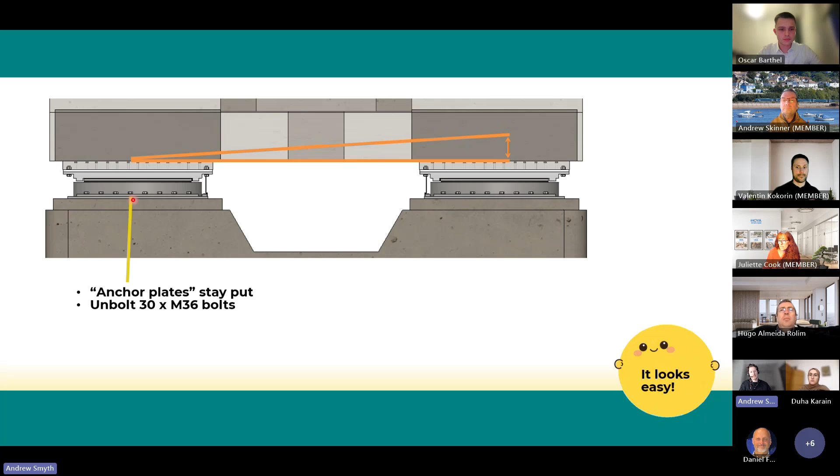When we take these bearings out, it's relatively easy because we have plates that stay in place, and all we're doing is unbolting lots of M36 bolts and pulling out these 7,000 kilogram bearings, which needs quite a lot of pulling. We have to be really precise about everything that goes back in, because we're working to 2 millimeters of tolerance between the bearings, so we need a really precise understanding of all the assembly heights and everything. It really helped to have drawings from the manufacturing of the bearings from the 90s.

All the quality control cards that they probably didn't think would ever get looked at, we found really useful just to see all the measurements of the different plates. So now we think we have an exact picture of what's gone in, and we know what we can put back in as well.

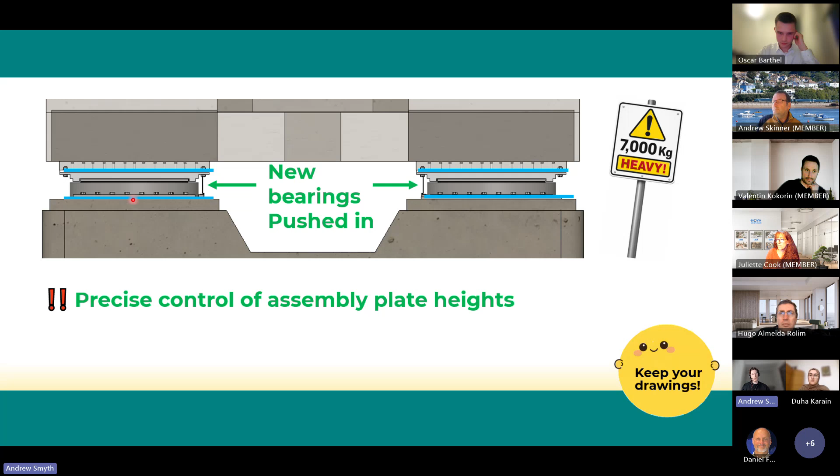So it's not always so easy. In this case of Storebælt, we could just put the hydraulic jacks in, there was space for them, but often with these old bridges they don't think about that. Sometimes you've got to build towers to put hydraulic jacks in, or some sort of brace off the side of a bridge, so it can get really expensive. Doing the assessment of the bearings beforehand is really important, because otherwise this kind of work can get pretty expensive.

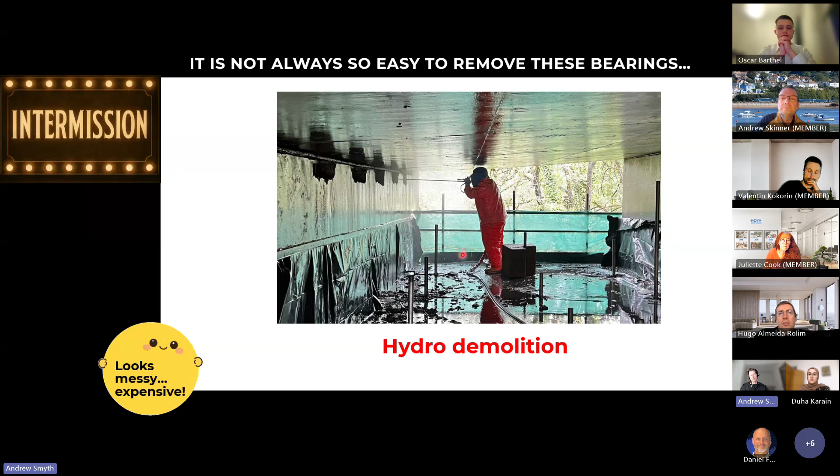We've got some interesting lateral restraint designs we need to do sometimes too, to stop the bridge deck falling off. And sometimes you have to smash away concrete as well — this is hydro demolition. We avoided it with Storebælt, we hope, but it can get very messy using high pressure jets of water to break away concrete. It's really expensive, very messy, and not very environmentally friendly, so we always try to avoid that if we can.

So then moving on to the next project we did for the client, which is: what is the strategy for replacing these 180 bearings? We want to do it in about 4 years of work. We worked out the best way is to have 2 platforms running simultaneously, and they can probably only spend about 3 weeks per pier at a time, because we're not working 360 days of the year — we're working to a smaller window based on the weather, so we have to take into account the risks of being out to sea. We came up with some concept designs for how to do that and how to build a platform.

What we've come up with is using a crane to lift a platform, which would have to be bespoke made, spanning across both bridges. We could also use a transverse crane in between the bridges. Bear in mind, these bearings weigh 7,000 kilograms, and we have to take the whole unit off in one go—we can't dismantle it on the platform. So that's quite a big weight to slide around and move off. We want to get these bearings onto a barge, and then take them off site.

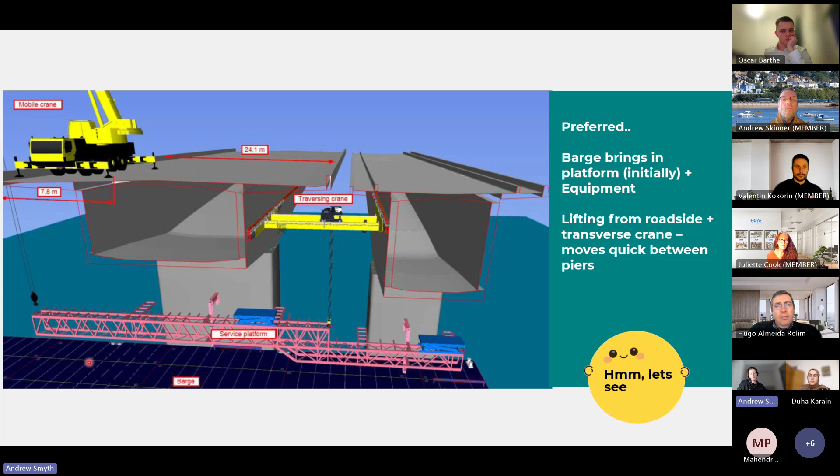What I will mention is that this is out to tender at the moment, so this is only a concept design. We're expecting the contractors to come up with some quite innovative designs where they'll have to take a lot of different things into account. So this is where we'll use the competitiveness of a tender.

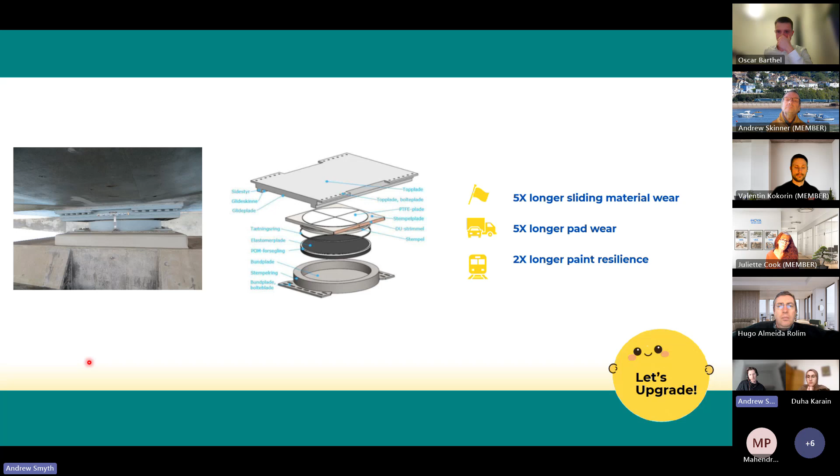Going back to the bearings, we're going to upgrade them so the sliding material or pad material will last 5 times longer because of improvements made to those materials, and the paint is going to be more resilient as well because of the way you apply it.

Now, looking at the actual cost of the project, it's about $27 million. The bearing cost is probably about a third of that, which is relatively high. For smaller projects, the bearing cost is relatively small and the overall works is more expensive.

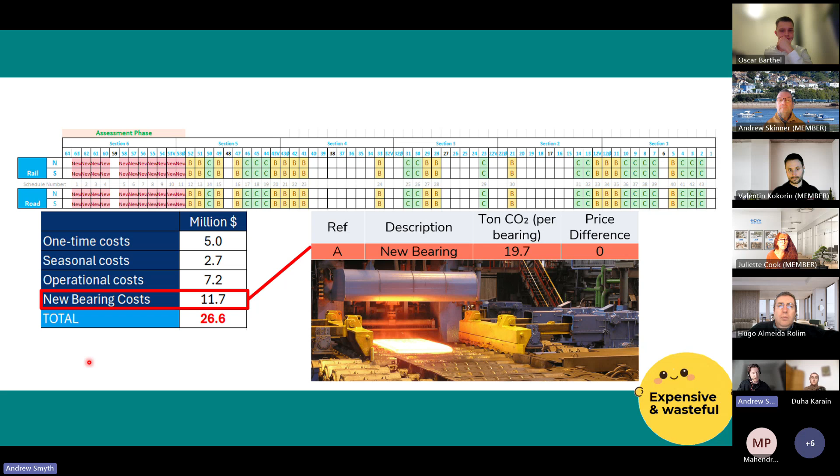The reason for it is because we've got these massive bearings. They're made of steel, and it's not very energy efficient to make these things. It requires a lot of hot rolling of steel, about 20 tons of CO2 per bearing, which is hard to get your head around. It works out to around 6,500 UK houses—that's what their energy use would be for a year—to replace about 180 of these bearings, thereabouts, to try and put it into context. So yeah, it's expensive and not good for the environment either.

So we looked at, could you reuse the bearings instead? And we think we can. So what would that look like?

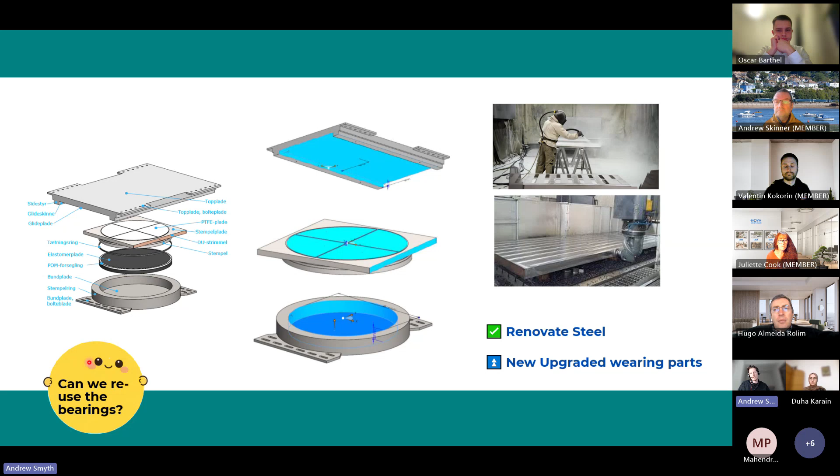That would be taking the bearing off to a workshop, separating out the main steel parts, shot blasting them, cleaning them up, doing lots of NDT tests, then basically repainting them, machining them down a little bit, and getting the new wearing parts that we've improved, putting it all together—and hey presto, we've got almost like a brand new bearing that most of it is actually being reused. The effect is that it's about 50% cheaper to do a renovated bearing, which was a little bit of a surprise to us. But when we're talking about very big pieces, there is a big saving.

And there's also a huge CO2 saving—about half a ton of CO2 compared to about 20 tons of CO2 for a new bearing.

Now, it's not just as simple as every bearing can be renovated. It might take about 4 to 6 weeks to renovate a bearing, and we can't sit around for 4 weeks waiting for the renovation to be done. So when we take a bearing out, we're going to have a brand new one ready to go at the start of the project. What that means is in the first year of works—we're going to call it an assessment phase—every bearing we work on, we'll have a brand new one ready to go that we just pop back in. So there's no standing time.

But then all the bearings we've taken off, we're going to refurbish off-site, in the quiet of winter when we have a bit of time. Then we'll assess how the renovation is, and if they're good enough, we're going to put these bearings back in for the second season. That way, the rest of the project becomes quite sustainable.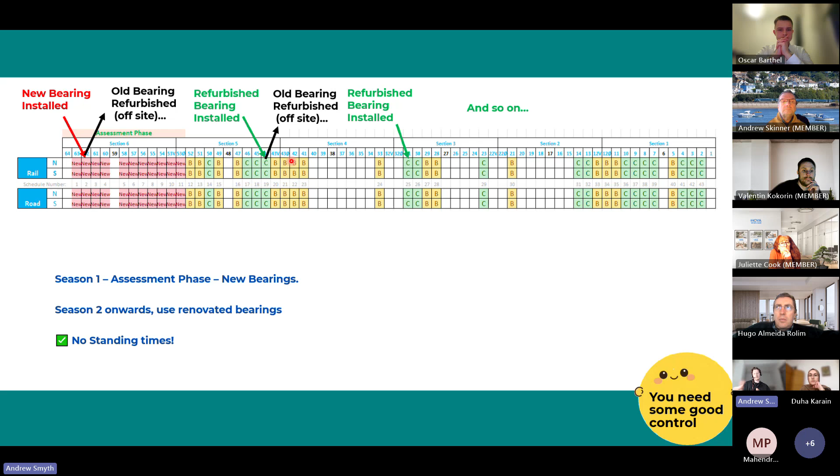So that was a lot of information. Good stuff.

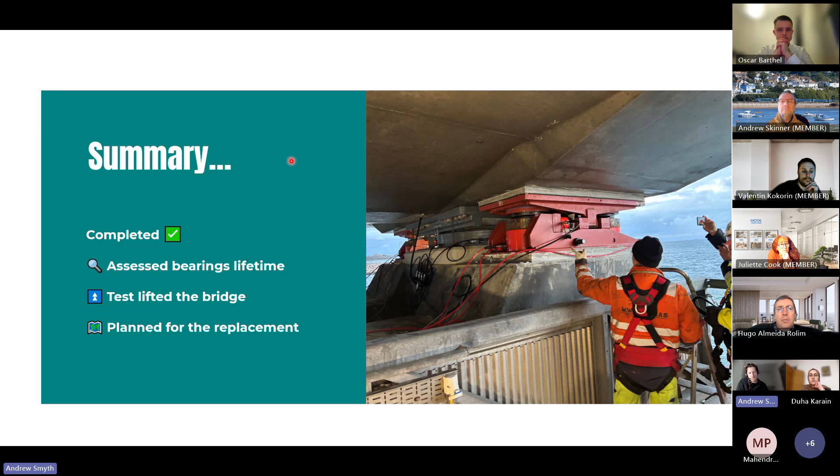So we've assessed the bearing lifetime, test lifted the bridge, and planned for the replacement project. The next stage is to appoint a contractor this year, do some detailed design planning, and then we're going to be on site from 2028 to 2032.

In terms of the development, we learned a lot from the calculations that we did in the assessment. We spoke to test houses and improved the way bearings can be assessed by doing this kind of work. A further improvement would be more modal analysis to measure damage on bearings and bridges, which is being advanced now.

I've thrown out a few tips along the way, but one I haven't mentioned is this: now that you know about bearings, be careful while driving. Don't look up, because there's a bit of a curse. I find myself constantly looking up at bearings, trying to work out what kind it is and what it does. So be safe and keep your eyes on the road if you find bearings as interesting as I have. And that is the lot.

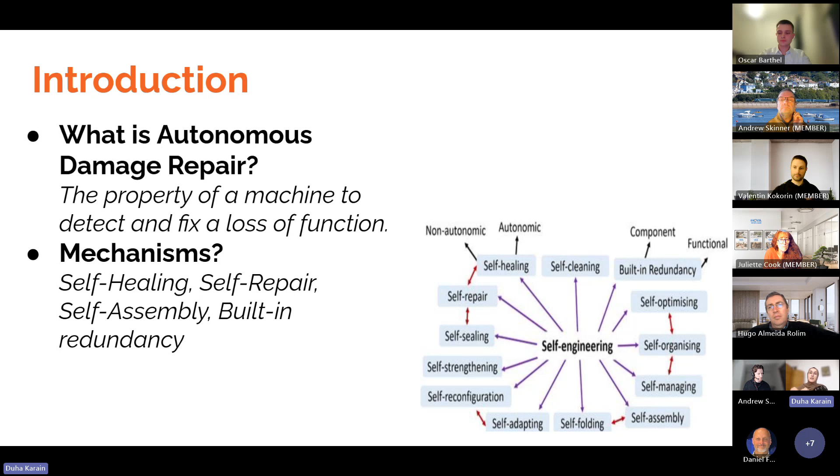How far are we from completely autonomous self-fixing systems, and would we want that? Before I finally conclude. What is autonomous damage repair? It is the property of a machine to detect and fix a loss of function without relying on any human intervention. And some of the most well-researched mechanisms as of right now are self-healing, self-repair, self-assembly, and then that ties into the functionality of built-in redundancy, which I'm going to talk about later.

This could be done in a slightly better way through a vascular system, much similar to the veins in our body, which covers more area. It's going to rely on little tubes that break and release that healing agent once damaged. We can also use shape memory materials, which are materials that have the special property of remembering their original form. And so with the application of some external stimulus, such as heat, it's going to revert back to the way it looked before.

Now that we have an idea of how it is employed, let's look at a real-life application for self-healing, which is in the field of soft robotics. Soft robotics is a subfield of robotics that concerns the design, control, and fabrication of robots composed of compliant materials. Now, because these robots are softer, they are much more useful and safer to use in fields or work where we need the machine and the human to work together, but it is that same compliance that makes it more susceptible to damage. And that is where self-healing would be very beneficial.

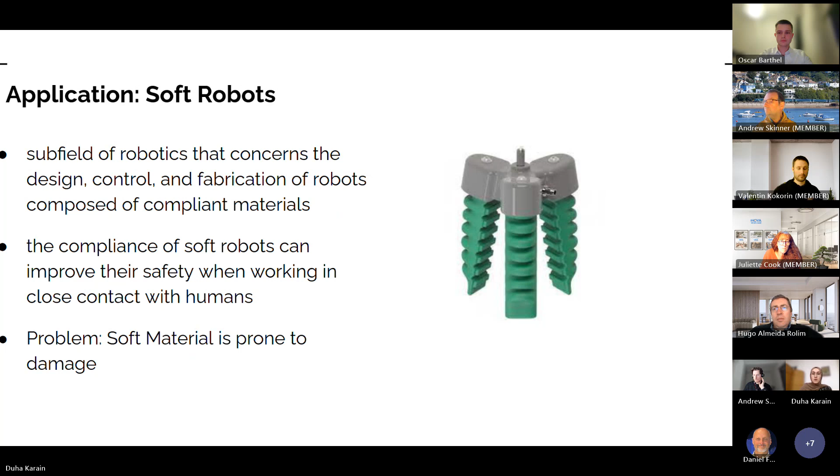I'm going to show you now a small video of an experiment done by Cornell Engineering. Can you see the video? Okay.

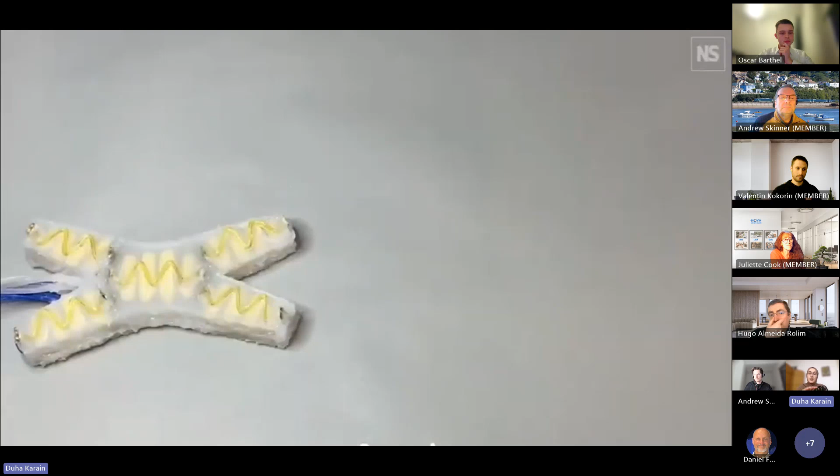This robot here gets punctured once in the leg and halts for a minute, and during that time, it's self-healing. After the minute has passed, it continues on its function as usual. This happens for 6 more times in 6 different areas throughout the video. Each time it halts, self-heals, and then resumes its function.

Now that was for something as simple as a minor puncture, where the surfaces were still intact, which is what we need for self-healing, for the chemical reaction to take place and for the bonds to reconnect. But what if the surfaces get separated from one another? We're going to talk about 2 scenarios here, and the theory for how they would be fixed.

And to fix that, we're going to use pneumatic artificial muscles, which are little muscles or tubes within the robot that can contract and expand with the application of pressurized air. So what's going to happen here is in type 1, the muscle would contract and bring the surfaces back together again, which would then help initiate the self-healing process.

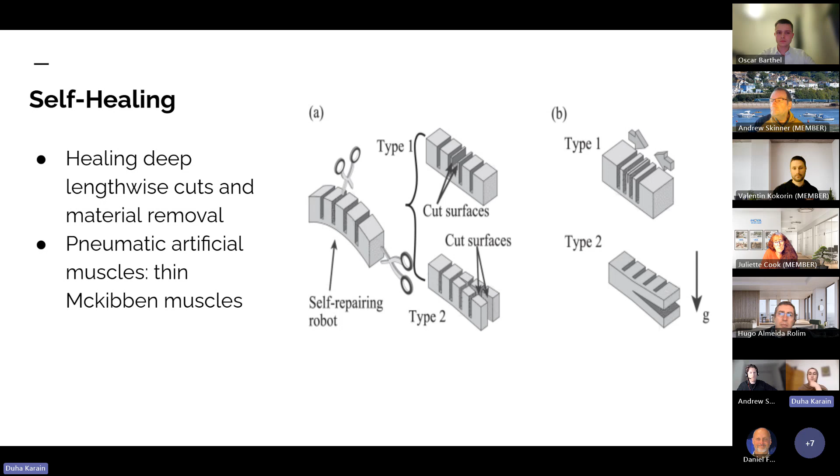Of course, this is all preliminary research, and it faces many problems. One is that it's very reliant on certain external stimulus and cannot function as well outside of a lab. For example, for shape memory materials, we need an external stimulus, like heat, to initiate self-healing. Also, it's limited to one occurrence. If the microcapsule breaks, that area no longer has the healing agent, so if it breaks again, it won't self-heal there again. It's also difficult to implement on metal since it heavily relies on chemical reactions and bonds.

But that's not a big problem, because we're going to talk about how a machine comprised of metal can fix itself, through the process of self-repair. Self-repair is used on unit modular robots.

We need a robot comprised of identical modules. To simplify the process: when a module fails, it has to be detected, its removal has to be effected, and while that's happening, a replacement has to come in its place, and the parts that were tied to the failed module have to reform around this replacement.

I'm going to simply explain what's happening in the image here. The yellow robot in picture 1 is the failed module. Within a modular robot, we have subgroups termed master modules and slave modules. The master of the failed module is going to realize or detect that the failed module has stopped working because it will have a loss of infrared signals for 6 seconds.

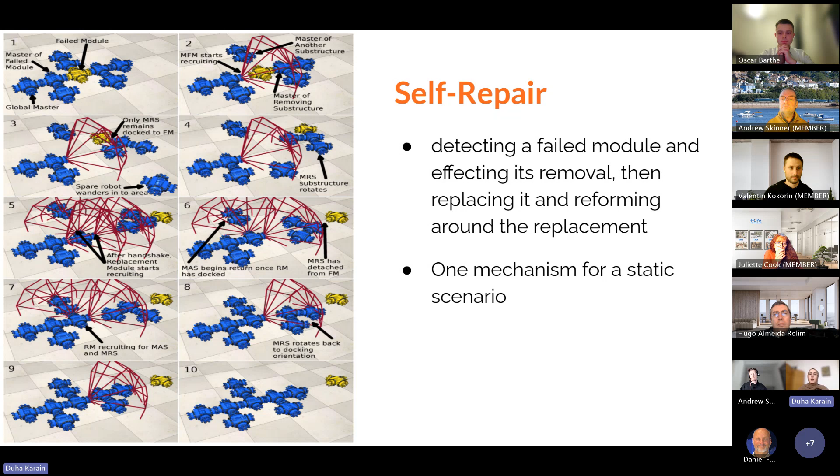For self-repair, we need to understand an important functionality: built-in redundancy. There are two types. Component redundancy relies on identical components to replace the failed module — for example, a system with spare memory cells, where if one fails, it can be replaced by an identical component.

There's also functional redundancy, where it's not an identical component but can do the same function for a while. For example, in a car, if the engine fails, the starter motor could replace it for a while.

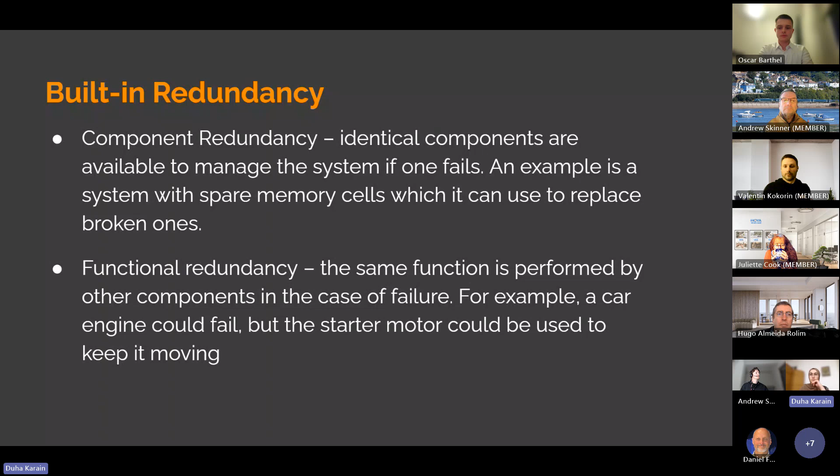Now we've looked at how soft robots could fix themselves, and how robots comprised of metal could repair themselves. But what about a more severe scenario where the robot undergoes a high energy event? The concept here is creating bonds between the modules weak enough for structured disassembly, so we can control the way in which these modules separate from one another and scatter.

What's going to happen here is that the modules are going to communicate with one another through preset patterns or through blinking lights. And once every module has understood its relative position to the rest, they're going to start locomoting using sensors until the parts have docked onto one another again, and we get the fixed robot.

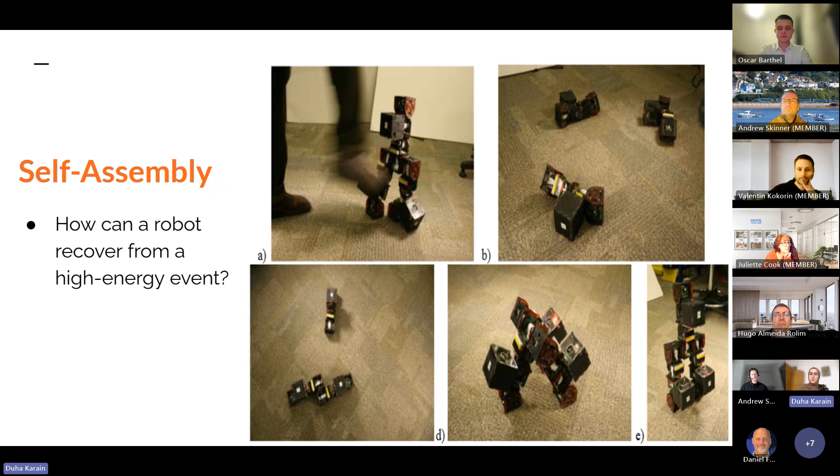Now let's do some evaluation. What do we stand to gain from this idea of indestructible robots? Firstly, for industrial automation, that would mean minimized downtime, and that would ensure a continuous process, more efficiency, and reduced costs. And because robots need constant maintenance, such a case would create a big loss in revenue for whatever company. So if the robot could diagnose the problem and fix itself, that would be very helpful.

Then there's the more exciting aspect of home and personal use. Usually, if one of our home appliances gets damaged, we're going to procrastinate fixing them for at least a couple of weeks. And then we're going to have to call in a mechanic, and it's just such a hassle. If the robot could diagnose the problem and fix itself on its own, that would be great help.

Then for space exploration, there have been many instances where robots or mission rovers failed to continue their missions because of minor problems that could have been fixed if there was a mechanic on hand. For example, in 2016, the Curiosity rover had a simple problem in its drill feed mechanism, and that put the mission on hold for 2 years.

There are other examples where that weren't so lucky. The Spirit rover had its mission terminated simply because its wheel got stuck in the sand.

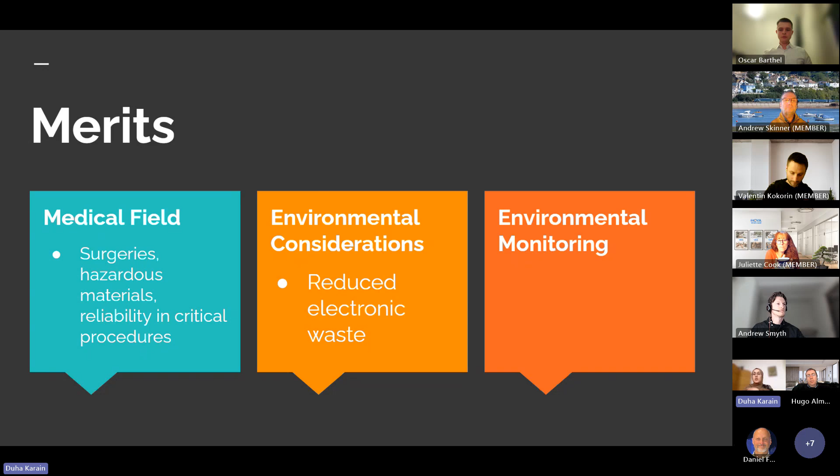There are, of course, a few challenges posed by this concept, namely material limitations. Functionality is going to be compromised if we're fixating on possible scenarios that might not happen. If we're putting too much thought into possible scenarios where the robot could get damaged, we could deviate from the main functionality of the machine.